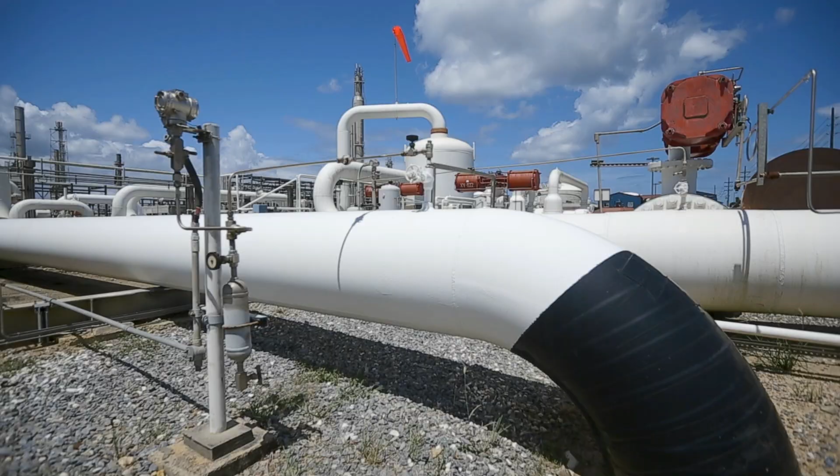Phoenix Park Gas Processors Limited, PPGPL, is a subsidiary of the National Gas Company of Trinidad and Tobago Limited, NGC. Its plant and dock facilities are located at Rio Grande Drive, Point Lisas Industrial Estate, with its administrative office at Rivulet Road, Couva. The plant facilities encompass the administration buildings, laboratory, warehouse, dock facilities, and process areas. Other associated facilities include an 8-inch NGL pipeline and valve stations traversing the southwestern part of Trinidad to Point Lisas.

The core business of operation is natural gas processing, fractionation, and natural gas liquids marketing. The plant is designed to handle 1.95 billion cubic feet of gas per day, an amount that would circle the globe 15 times if this gas were to be packaged in 1 cubic foot containers.

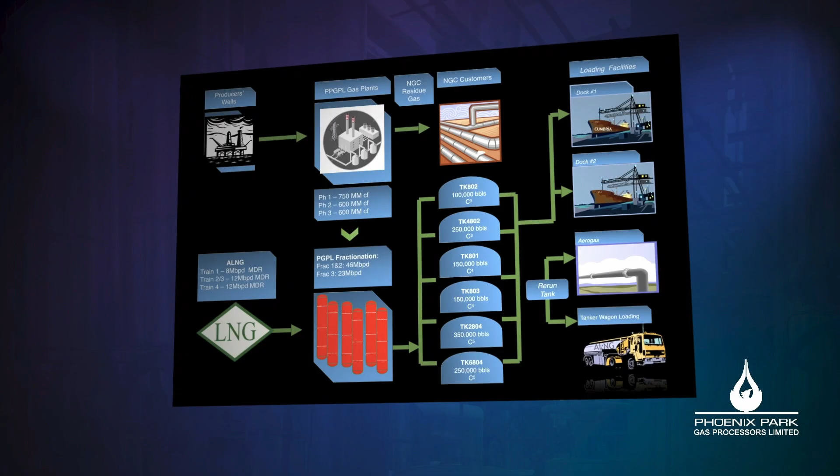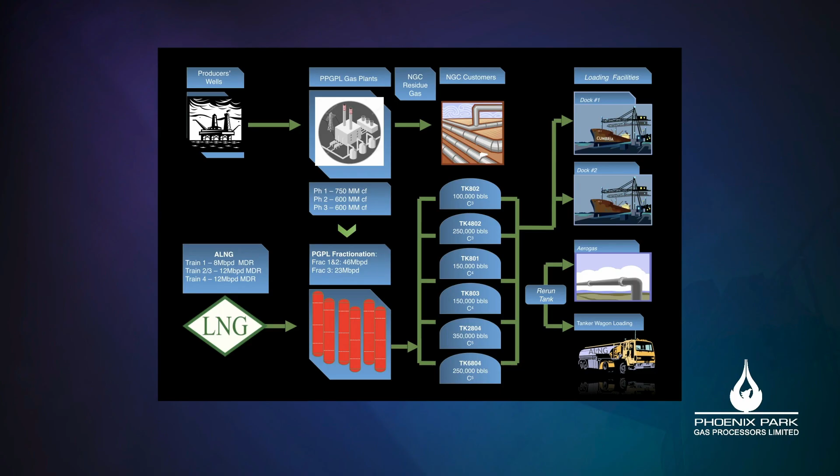Natural gas is processed at PPGPL. Propane, butane, isobutane, and natural gasoline are removed from the natural gas stream for storage and export. Methane and ethane make up the residue stream and are used by the downstream industries.

In today's fast-paced environment of industrialization, safety is of the utmost importance to PPGPL's operations. Let's hear from Company President Dominic Rampersad.

Here at PPGPL, our management is committed to providing a safe, healthy, and secure working environment. The board and management of PPGPL are committed to ensuring all work activities are carried out safely and in a manner that preserves life and the environment. We will do this through the implementation of all possible measures aimed at reducing, as reasonably practical, the inherent impact to health, safety, and welfare of workers, contractors, authorized visitors, and all stakeholders who may be affected by our operations.

PPGPL's HSSE goals: the company's main HSSE goal is Quad Zero - 0 employee lost workday cases, 0 contractor employee lost workday cases, 0 preventable vehicular accidents, and 0 environmental incidents.

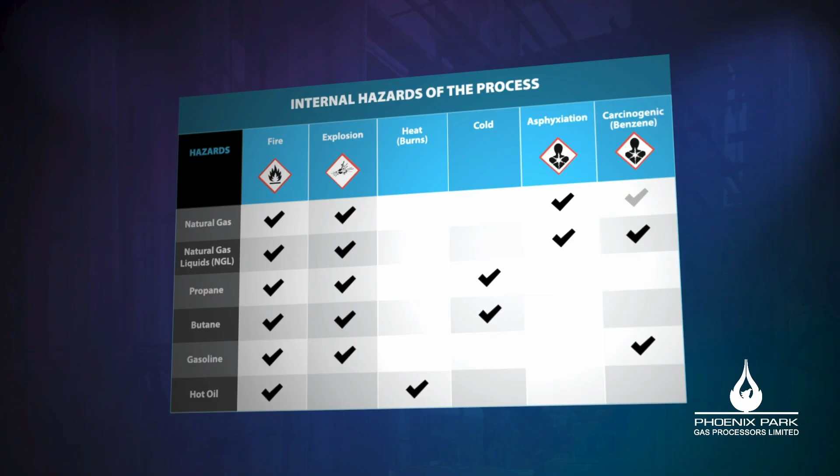The hazards associated with PPGPL's processing operations are clearly outlined for all employees, contractors, and visitors. Internal hazards: the hazards associated with natural gas processing are fire, explosion, asphyxiation, hot and cold burns, and exposure to benzene. Natural gas liquids, NGLs, bear the same hazards as natural gas.

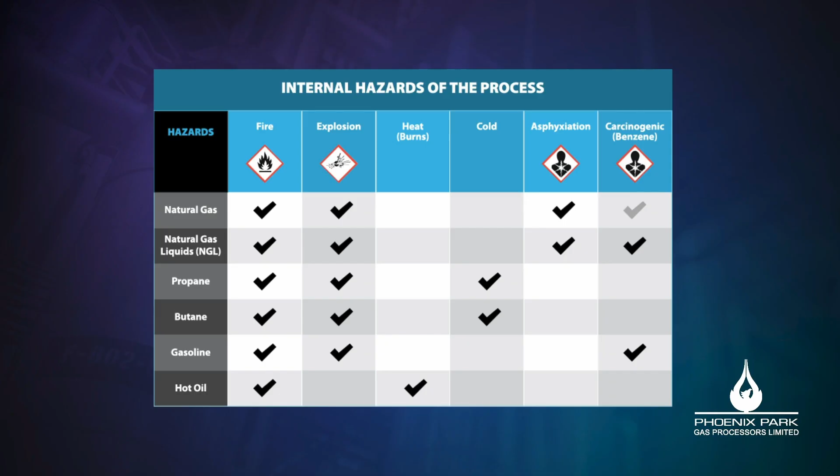Propane, in addition to fire and explosion, carries another dimension of hazard, sub-zero temperatures, and so does butane. Dangers from gasoline are fire and explosion and exposure to benzene, while the hazards from hot oil are fire, heat, and burns.

External hazards: based on PPGPL's proximity to other chemical processing plants, there is the potential for exposure to chlorine and ammonia gases. The hazards from exposure to these toxic gases are corrosion, asphyxiation, skin burns, and eye irritation.

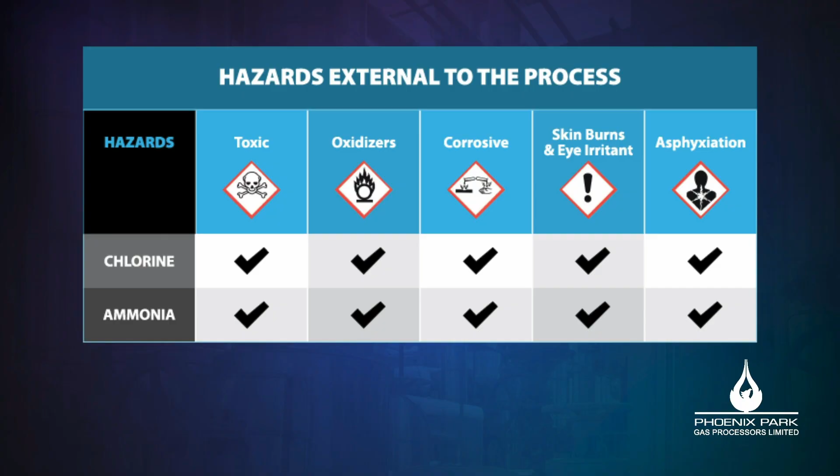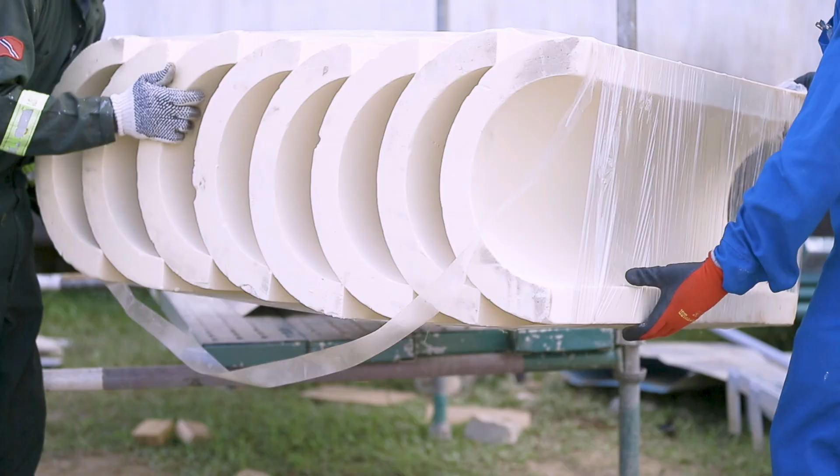General responsibilities: contractors and visitors have these responsibilities. Safety is a condition of employment. All incidents are preventable. Employees are responsible for their safety and the safety of those around them.

Prior to conducting any work on PPGPL's facilities, a procedure must be developed and a Job Safety Risk Assessment, JSRA, must be done. All personnel need to be trained and competent in their work and have the necessary certificates for validation. Horseplay and practical jokes will not be tolerated.

Know the emergency response procedures for the facility. Practice proper housekeeping at all times. You must comply with PPGPL safety rules, regulations, warnings, and posted signs.

Entry requirements: because of the sensitive nature of our operations, PPGPL has a series of general safety provisions and entry requirements. First of all, for the plant and dock facilities, all visitors are required to enter and leave through the security checkpoints at the main security charge room. All visitors must show their picture ID for entry onto the plant and dock facilities.

For the buildings, only closed-toe shoes and sensible office attire is allowed. The appropriate chlorine and ammonia full-face respirators will be provided to all visitors before they enter the facility. Therefore, the clean-shaven face policy for full-face respirator use applies to all visitors and contractors.

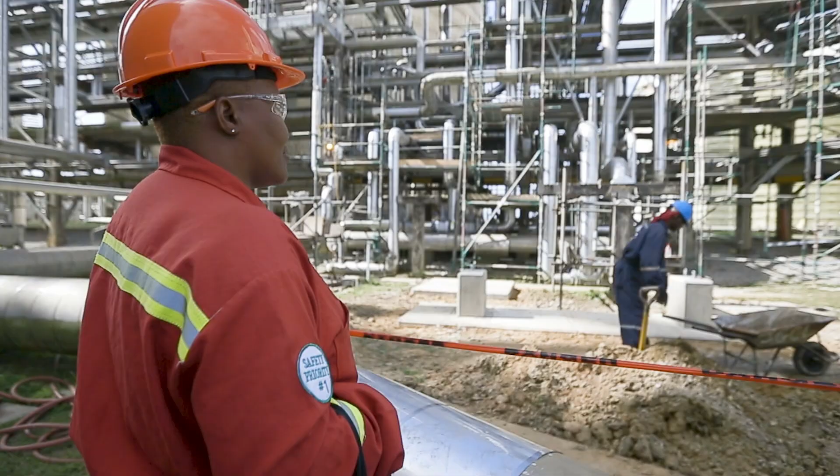You need to wear an approved flotation device when accessing the pier at the dock facility. Jewelry is limited to simple earring studs, simple watch and wedding bands. Unnecessary jewelry will not be allowed.

Emergencies and evacuation response procedures. So far, we've touched on hazards, responsibilities, entry requirements, basic PPE, and their use. But what do you do if faced with an emergency?

Building emergency response. In all buildings, the emergency building bell will sound. Leave via the nearest exit. Close office doors when leaving. Assemble at the north end of the emergency exit road. If not in office when alarm sounds, do not return to office. Follow the warden's instructions at the muster point. Wait until the all clear is sounded and instructions from the wardens before returning to your location.

Plant emergency response. In the plant, the emergency alert plant siren will sound. Office employees must exit buildings with respirators. Proceed through North Fence Gate and assemble at the north end of the emergency exit road. PPGPL's plant facility personnel shall assemble in front of the warehouse. Contractors shall assemble at the nearest north or east muster points. Follow your warden's instructions. Wait until the all clear is sounded and instructions from the wardens before returning to your location.

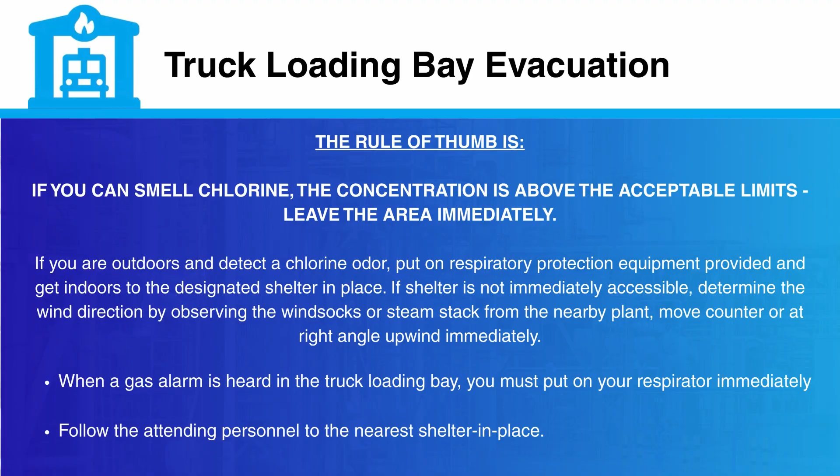Earthquake response. If indoors, watch for falling objects. If in danger, get under a table or desk or in a corner away from windows. Encourage others to follow your example. If outdoors, seek open areas away from buildings or power lines.

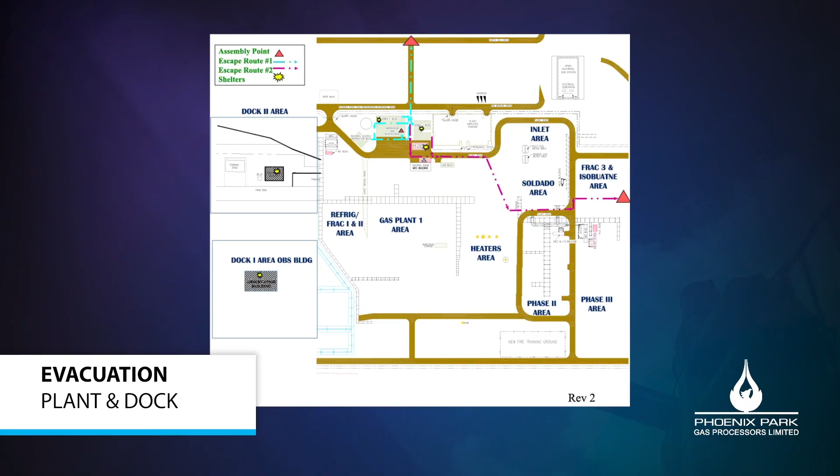Evacuation procedures. Know the diagram of the plant area. The plant emergency siren is tested at 12 noon every Tuesday for 10 seconds—no response is required. For a plant emergency, the siren goes off with an undulating sound. When that happens, you need to follow all warnings and instructions.

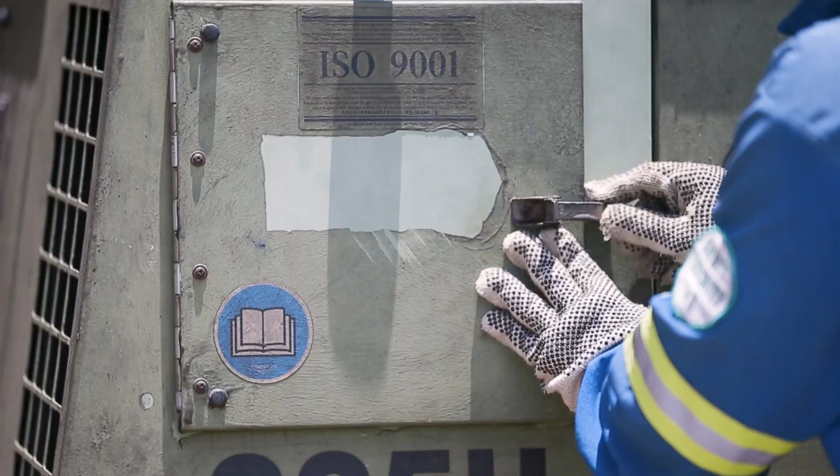You need to stop all work and meetings. You need to leave the work area as safe as possible. Proceed on foot to the designated assembly point for a head count. Do not go to the car park and start any vehicles. Wait until the all clear is sounded and instructions from the wardens before returning to your location.

Reporting of emergencies. Treat all incidents and accidents seriously. Visitors and contractors shall report immediately all emergencies, fires, spills, injuries, illnesses, vehicular accidents, and near misses to the PPGPL host or control room.

Why safety matters. To sum up, the company's president, Dominic Rampersad: Safety is the responsibility of everyone at PPGPL. It ensures the occupational well-being of all stakeholders entering our facilities. It ensures the economic sustainability of the company. It ensures the continuity of our operations, and it ensures compliance with the law.

Our safety watchwords: Remember, our work is never so urgent or important that we cannot take time to do it safely and in a manner that preserves the environment. HSSE is everybody's business, and that includes you.